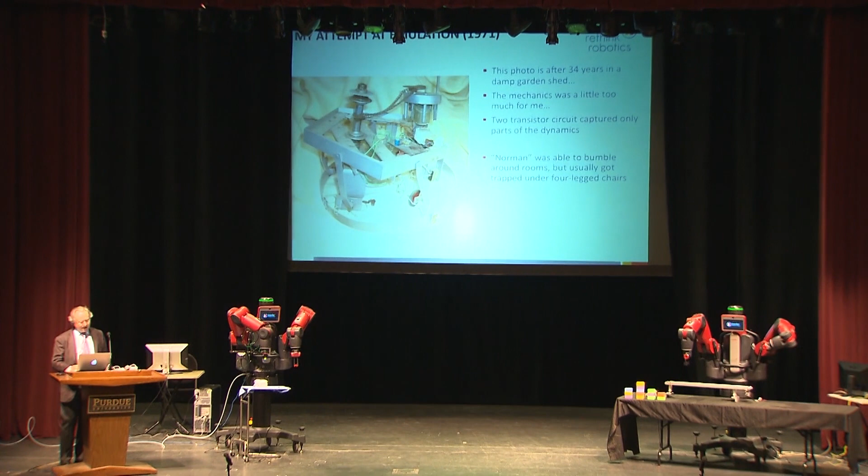So back in about 1971, I tried to build a robot based on these ideas. I used transistors rather than vacuum tubes, which didn't have all the non-linearities. This is the robot after it had been in my mother's garden shed for 34 years. It didn't look quite that sad in 1971. But it could get around the house, it could follow the lights, it could go under chairs with four legs and get stuck in there and not be able to get out. So it was a lot of fun.

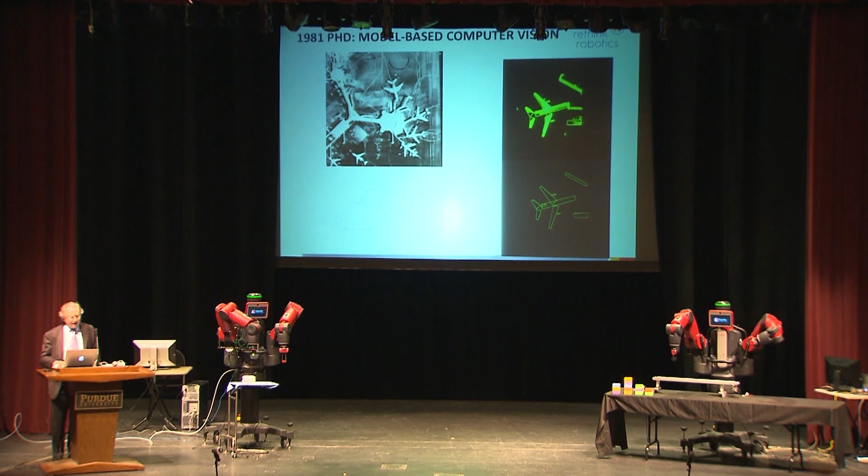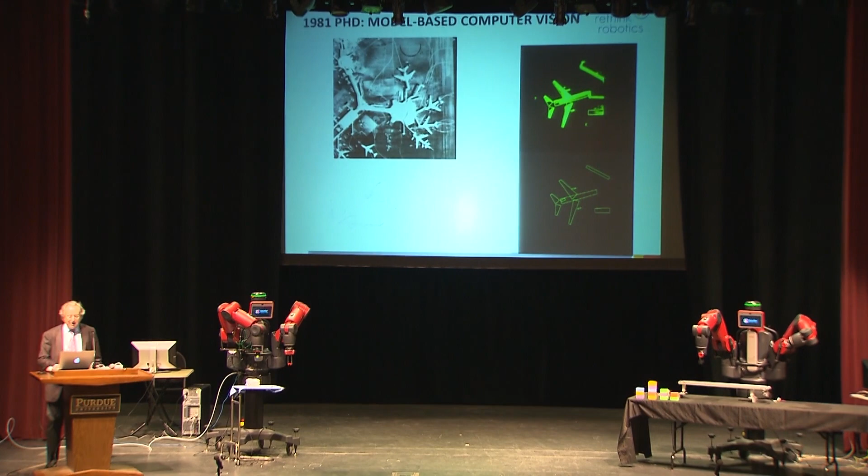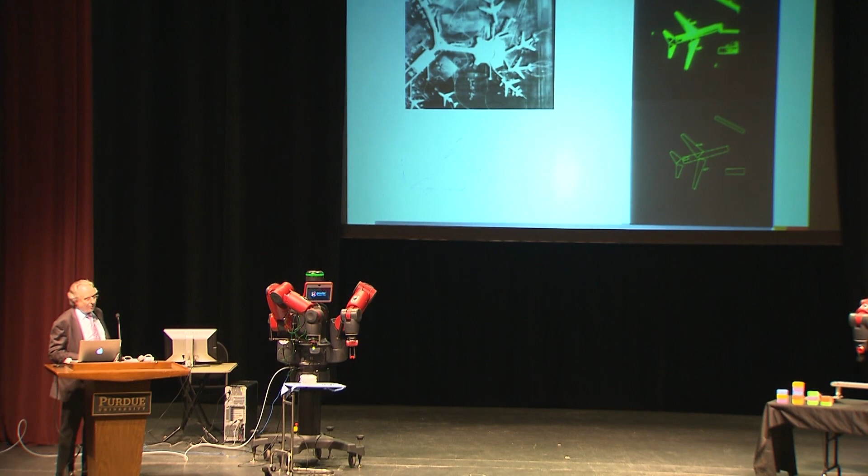I ended up at Stanford doing a PhD, and this sort of set my direction for a while. I did a PhD in model-based computer vision. On the bottom left are models of airplanes, three-dimensional models, and with a mere 48 hours of computation from that image in the top left, we'd go through to what's on the top right and get down on the bottom right a model of the plane, with only 48 hours per image. For my PhD thesis, I actually ran it on 3 images. Now, if you don't run a PhD thesis on around 3 billion images these days, you're not really testing it out. But it was about geometry.

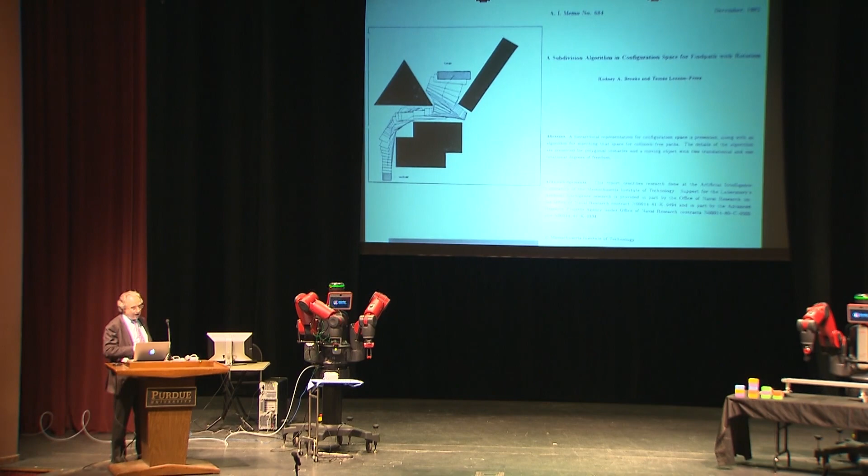So I went to MIT as a postdoc and started working on path planning and trying to apply geometry to robotics. What you see there in black are obstacles in two dimensions, and there's a rectangular object starting down in the bottom left-hand corner. This is finding a path for it to move in two dimensions amongst these obstacles without causing a collision.

I went on to think about how to get robots to plan tasks, and to figure out how uncertainties, errors in placement of things, propagated through plans, using all sorts of horrible, long, symbolic, algebraic descriptions of the errors and analyzed them.

Eventually I started to put all this together into a system which used a robot and stereo vision to get a model of the world, a geometric model, and then plan paths. This is from 1981. This is the stereo algorithm running, which I got from Keith Nishihara.

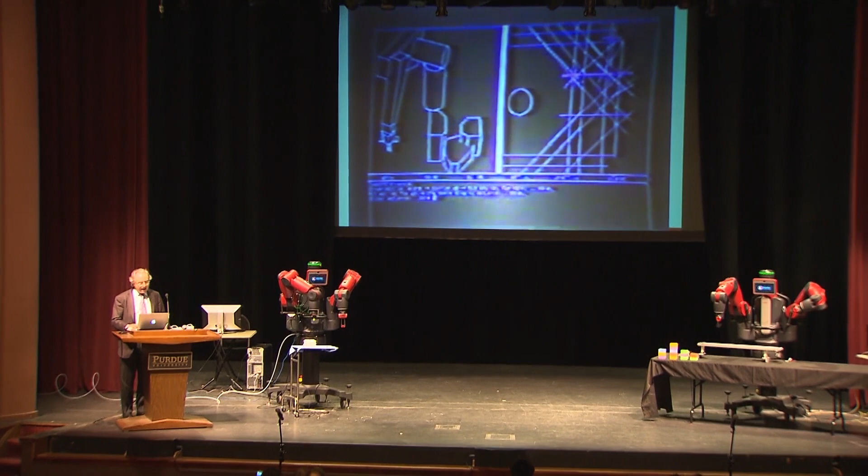And then computers had sped up. We had dedicated special purpose processors by this time. After about 10 minutes of processing, the system was able to plan out a path for that robot arm to avoid the collisions with the obstacles. Eventually we got it over to the robot, and it was able to move to do a simple screw insertion task, having planned it itself, with about 10 minutes of computation, and was able to get it in there.

I won't show you the other examples. But at the time I noticed, man, it takes pages and pages of equations to get our robot to do any new task. It takes lots of computation still on these dedicated complex machines. I was actually in a mosquito-infested area at the time, and I noticed mosquitoes could fly around really well, way faster than any mobile robot could wander around at the time. And they didn't have really big computers on board, as far as I could tell. They had maybe 100,000 neurons, which were pretty slow.

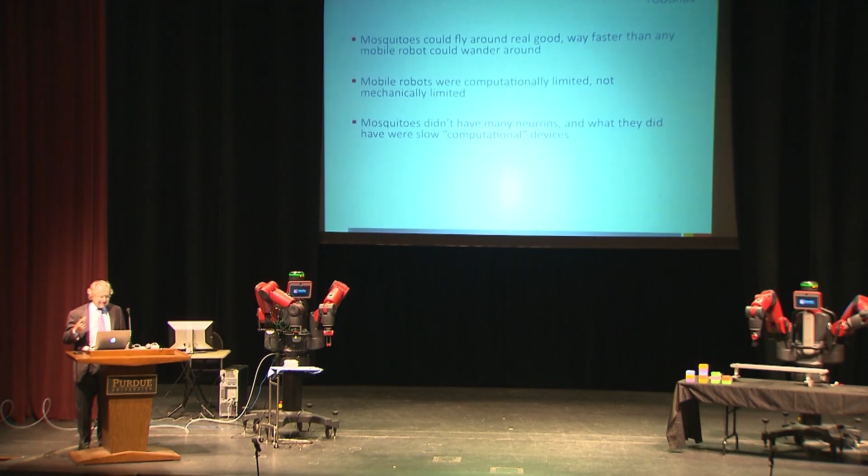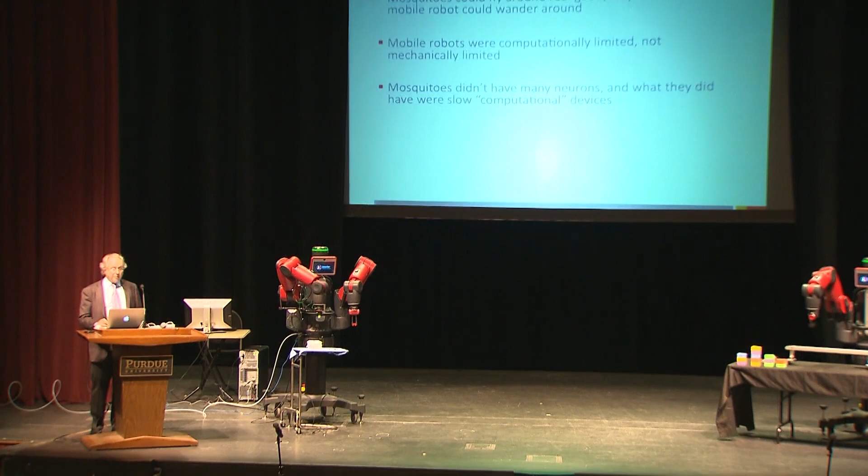They're computationally limited, and so they didn't have much computation, but they were able to act much better than any robots at the time. Right around that time, in 1981, Hans Moravec at Stanford had got a robot to go 20 meters in only 6 hours using vision to get around obstacles.

So it seemed to me we were doing things wrong somehow, thinking about too much geometry. And I started to think about how we could model animals, simple animals, insects in particular. I was in the AI lab, so I figured I'd just rename it to be the Artificial Insect Lab.

And so that's what I started doing, thinking about how to build robots in different ways and how to arrange their computation. I had this paper, which was actually published in 1986. And for those of you who get bad reviews, these were the reviews of this paper. I would suggest the author wait until a more complete version is implemented and tested before resubmitting. And the other review said it's in a tender stage of development. But somehow the editor liked the paper enough and got it published, and that's what made my career.

So, there are bad reviews. Forget it. Just keep going. Things work out. But from this paper, I worried about having multiple goals, how to have high-priority goals while servicing low-level goals, how to deal with multiple sensors.

And as soon as you have more than one sensor, you're going to get conflicting information about the world. It's going to be inconsistent. What if some things fail? How do you keep it robust? You can pull a leg off a beetle. I don't recommend doing that, but if you pull a leg off a beetle, the beetle can still run. It can lose sensors, and it still operates.

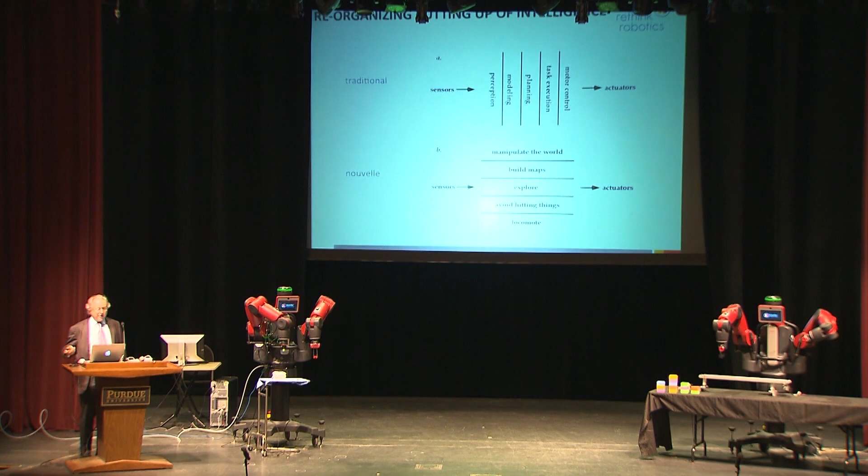First thing is get the robot to be able to locomote, then get it to avoid hitting stuff. And when they're both running, then you can get it to explore. And you don't have to worry as you're exploring about hitting stuff because that lower level behavior is still running. So the idea was to add new capabilities one after another.

I called this subsumption. And I thought of this as sort of recapitulating evolution at a sort of Scientific American level of resolution, where you connect sensors to actuators with a little sub-brain, and then you add more brain that does more connection of sensors to actuators, etc. And out of that, each layer has a little bit of perception, a little bit of planning, a little bit of action, and out of that you get a global behavior.

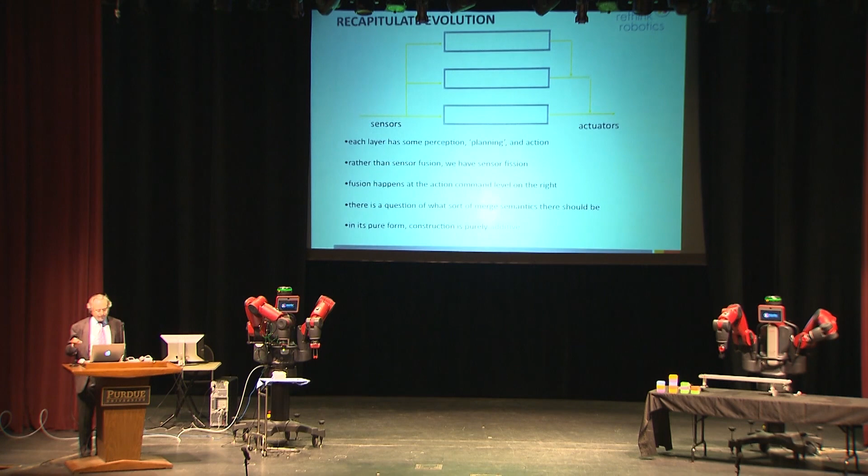So I did this for a few years with this architecture. Oh, I'm going to skip this slide. I've got too many slides here. Sorry, I should have got rid of that animation.

And so putting a layer to get a robot to wander around without causing collisions, of little tiny finite state machines talking to each other with messages, then adding a little bit more to make it wander and explore, and then adding a little bit more to get to goals that it saw in the distance.

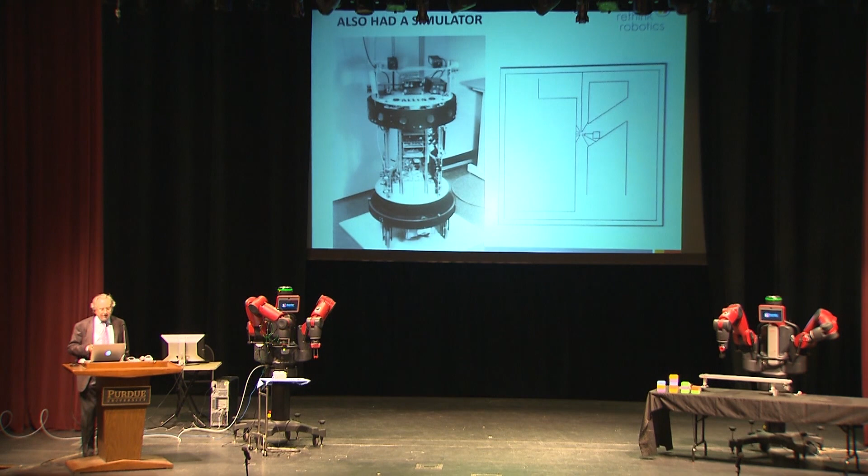And I built a robot back in 1984. I also had a simulator. And this robot was named Allen. It used sonar and cameras. And when I put this all together, this was the robot avoiding obstacles.

It sat still until an obstacle came near it, and then it would go away from it. And then another obstacle got in the way, and it would stop. And so this was able to operate not in the order of meters per hour, but in meters per second, or meters per minute certainly, so much faster than other mobile robots at the time.

People got very upset with me because it didn't have much detailed mathematics describing how it worked. It wasn't a real paper without lots and lots of equations. But I was sick of equations by then. I was a math major as an undergrad.

So adding a planning layer, here it's going to try to get to the far side of the room, and an obstacle appears dynamically in its way. At the time, all planners were for static situations without dynamic replanning. And it tries hard, and then eventually it manages to skirt by the obstacle. And if the obstacle moved in the meantime, it would capitalize on that in real time and gets around the obstacle, and off it goes.

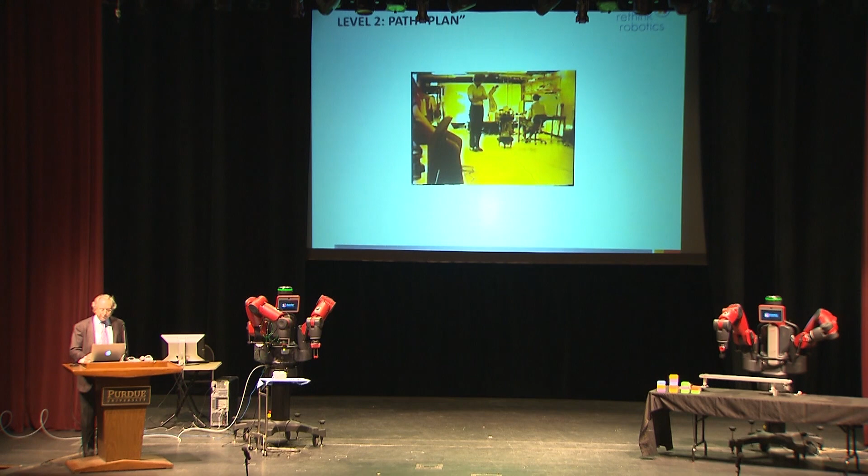So I was building mobile robots, looking at this architecture which is based on insects. And then I thought, well, let's make the morphology just like insects. And as Richard pointed out, this is Genghis, a six-legged rover, which was able to scramble over rough terrain. Also around that time, in the late 80s, I built my first vacuum cleaning robot.

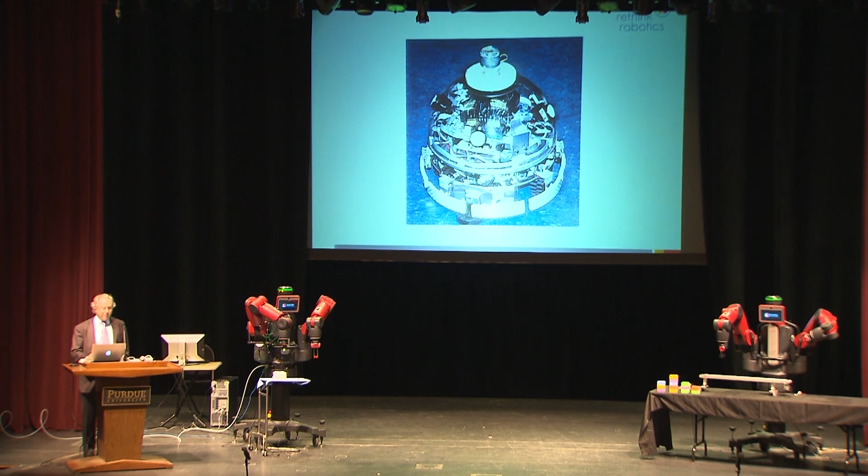It wasn't too well designed in that it sucked all the dirty air past the computer boards, which wasn't a great feature, but we'll get back to it.

With this six-legged robot, Anita Flynn, one of my students, and I wrote a paper for the Journal of the British Interplanetary Society. You might ask, why did we publish there? Who could resist a journal with that name? I had to have a publication in it.

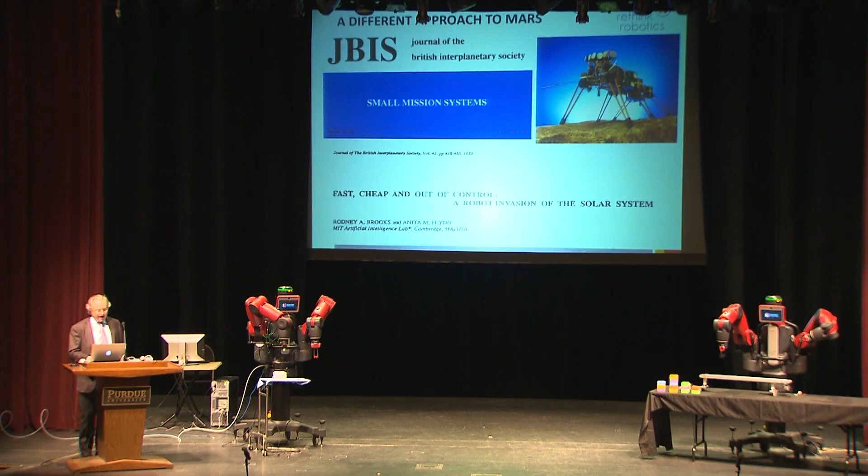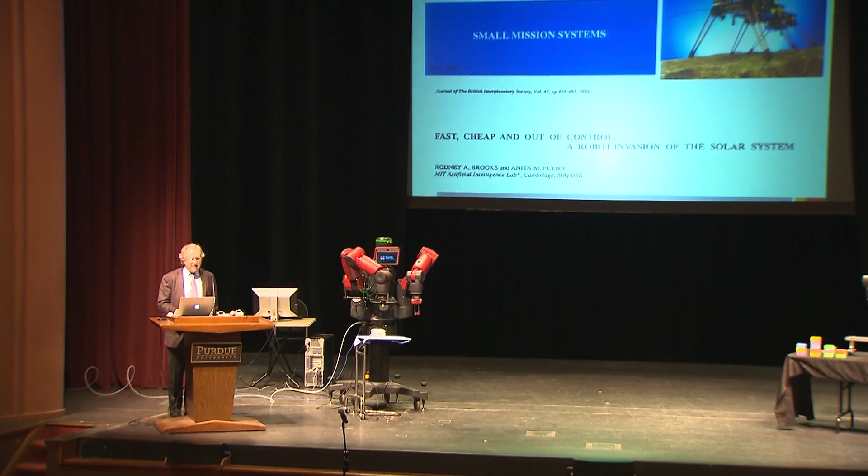And it was the same journal the idea for communication satellites had first been published in. So we said, instead of having a big robot that NASA was planning to send to Mars for a $12 billion mission, let's have little tiny robots that are not so expensive, so if you lose them you don't worry too much. It'll be faster to develop the mission, and cheaper because you have a lot less launch mass. And instead of making them servo-controlled from the ground, let them be autonomous. That's the out-of-control part in 'fast, cheap, and out-of-control.'

We worked with NASA and tried to get them to adopt this idea, and they started a little tiny project out at JPL with robots they called Rocky—Rocky 1, Rocky 2, Rocky 3. Colin Angle, here on the left, was my student at the time. He went out to JPL for the summer and got them going on that. But it was just a back-burner project.

Colin came back to MIT, and we decided we were going to do it ourselves. We were going to send robots to the moon and Mars ourselves. So we started a company which became iRobot. It was called iRobot. And by 1993, we had convinced the Ballistic Missile Defense Organization to do a test launch of one of our rovers on a brilliant pebble.

This is at Edwards Air Force Base. The sound should be on now. Avionics away. Photo on. So we've got a brilliant pebble—it has enough delta V to get from lunar orbit to the surface of the moon. But here we're doing a test in Earth gravity of it doing a soft landing.

The robot has been inside this vehicle for four days with no ground communication, totally autonomous. It does a soft landing, boots out the container—which is gravity loaded so that if it landed on rocks it would right itself—and then you'll see the rear leg of the robot on the right unlocking itself. It realizes its mission has started. It's undoing this canister, and now it's going to stand up, and we're going to launch this and have it land next to the Apollo 15 lander and do some metallurgy 20 years after it had been on the surface of the moon.

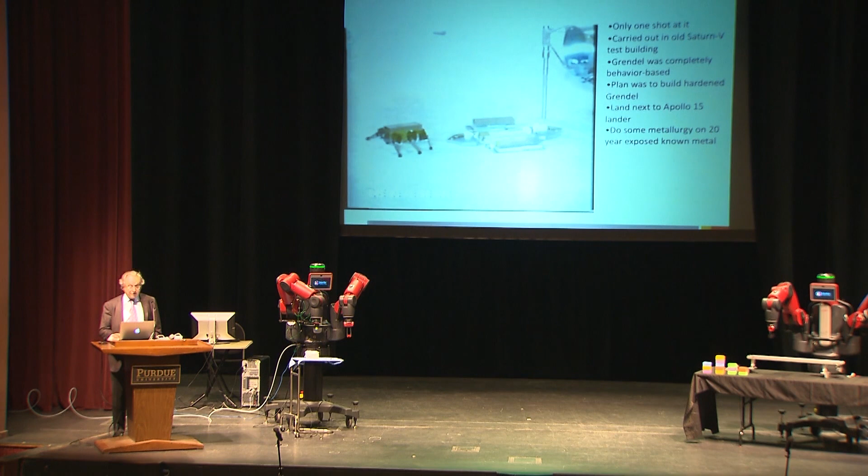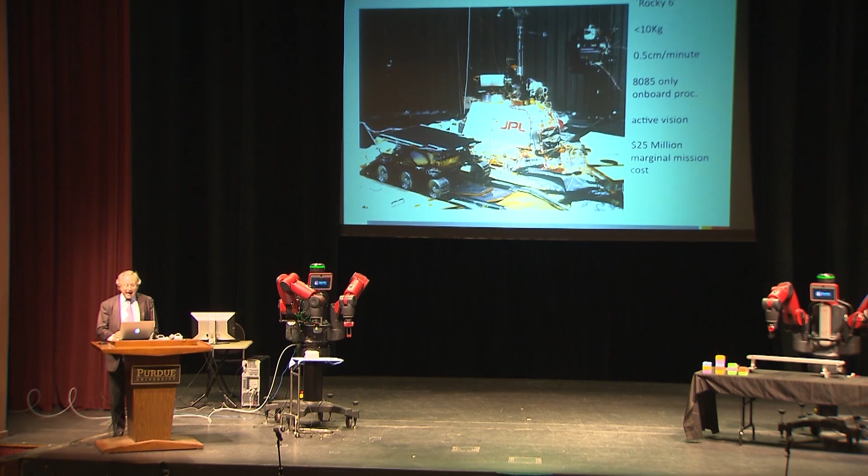Then Dan Goldin, the administrator of NASA, said, oh, we've got this little tiny project out at JPL building robots called Rocky, and we're going to land a lander on Mars in a couple of years. For $25 million, I'm going to add a rover to the Mars mission. And that's what he did. He put Rocky 6, which had come out of Colin's project—Colin is the CEO of iRobot—on board, at a $25 million marginal cost. It was launched on December 4, '96, and landed on Mars on July 4th, 1997.

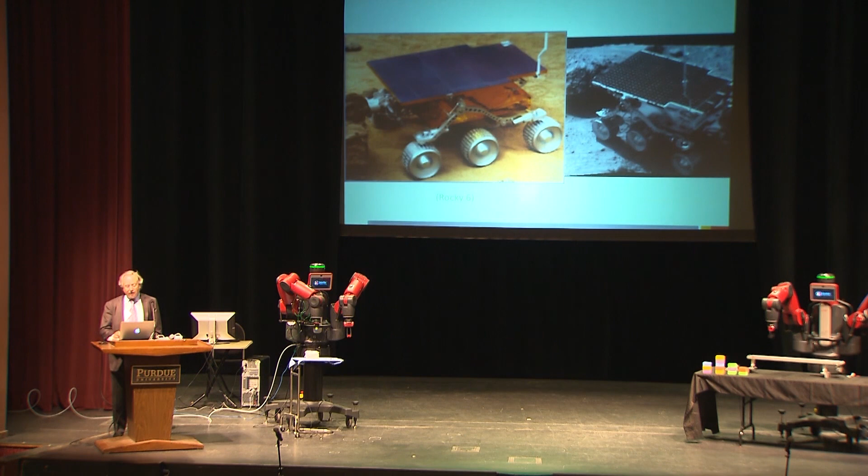The one on the left is the one back at JPL. The one on the right is a picture of Sojourner on Mars in 1997, and it operated until Sol 84. You can see it close in, and at the bottom, right in the middle, it's off in the distance from the lander. So we got our behavior-based rover running on Mars, and we effectively got a robot to another planet. Of course, our business model said we were going to do it—instead, NASA did it, so we had to find other things to do.

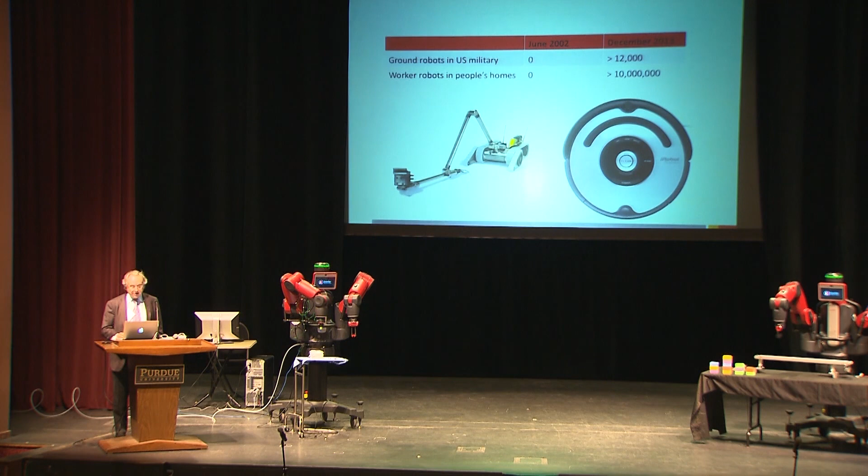And we searched around and got lots of things wrong, but we went back to vacuum cleaning robots and ended up building the Roomba, which is now 10 million of them have been deployed. And about 12,000 ground robots in the US military have been deployed in the last decade, about 5,000 of which are from iRobot.

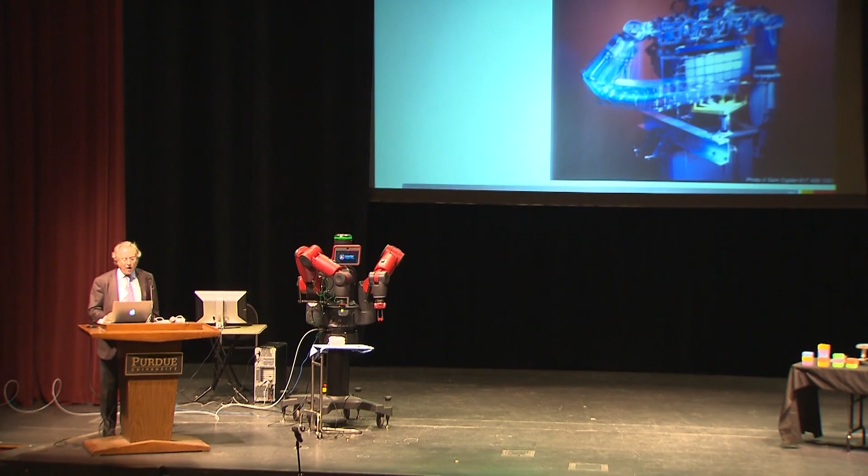So these ideas worked out pretty well in terms of getting them into practical robots. But then, while I was doing that at iRobot during the 90s, in my lab, I made a conscious decision to switch to humanoid robots, so it would be distinct from my company. This is the robot Cog, and Cog tried to emulate parts of the vision system. This is it saccading, and then moving its head while its eyes are looking at that object. And when we just added little parts of the human visual system, it started to be eerily lifelike.

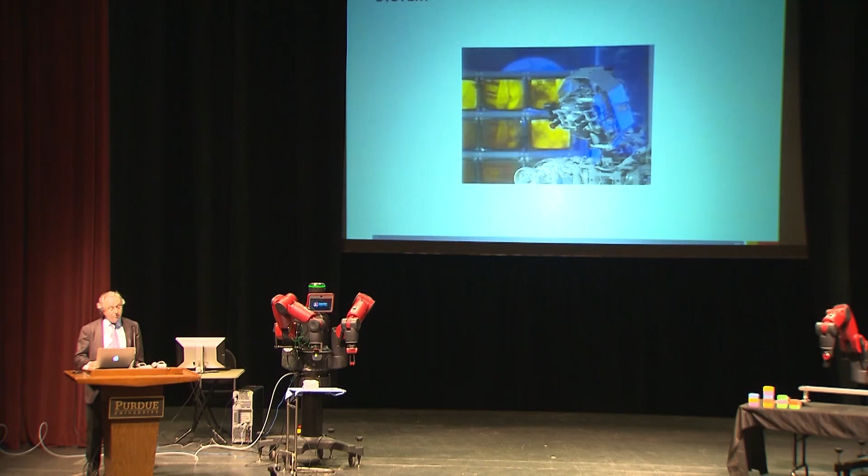And it surprised us, and it surprised people in the lab. So the grad students who had got the robot to do this started putting up barriers in the lab so the robot couldn't see them. Not because they thought it was invading their privacy, but they'd be sitting there at night, someone else would be using the robot, and the robot would look at them like this, and they couldn't, even in their peripheral vision, they had to look up.

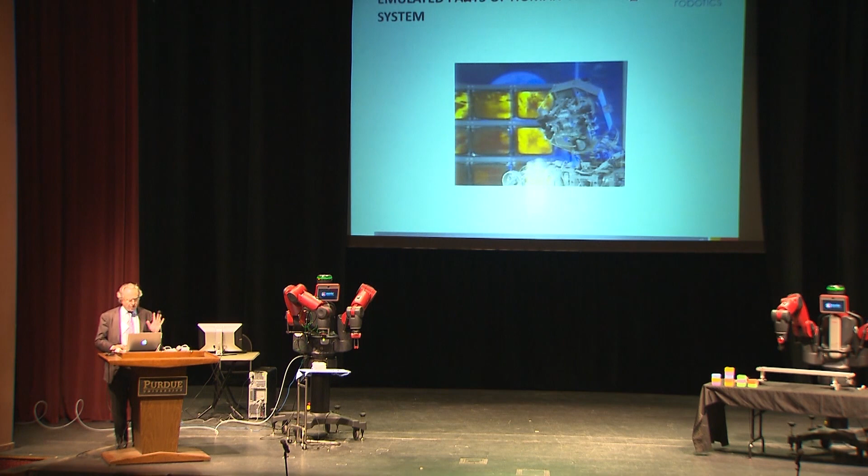So one of the things we found was it was very easy to have social interactions with these robots. We didn't have to have much sophistication. And we used something called series elastic actuators, and we were able to do tasks which used force and had to be compliant in the world with fairly simple controllers.

So there's the robot. Do we have sound? Maybe. There's the robot doing different sorts of drumming and then learning to drum in phase between the two arms, etc. And the key here was to use series elastic actuators.

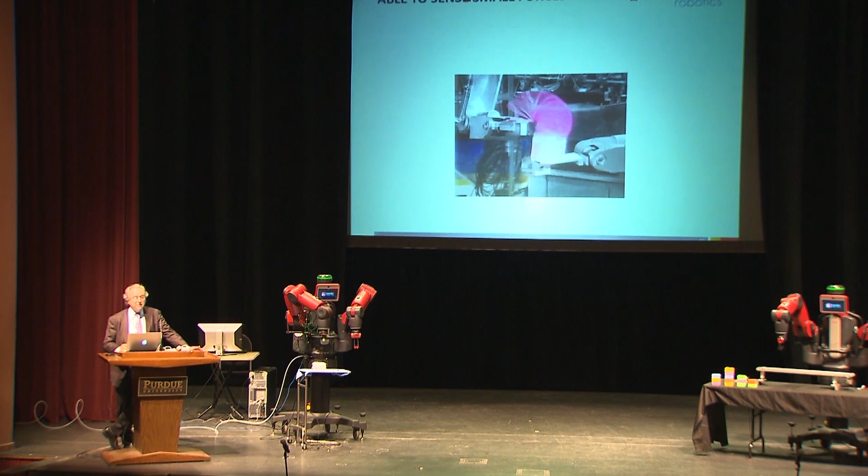I'm going to get to the next one. It gets worse. Series elastic actuators, which were co-invented by Gill Pratt, who's currently running the DARPA Robotics Challenge, the DRC, and Matt Williamson, who works at our company. You'll see a young Matt Williamson here.

And here it's doing the slinky, just measuring those very small forces and being able to feed back between them. Here it's got a pendulum, and it figures out the natural frequency of the pendulum. Here it's turning a crank, again, just by feel and force feedback.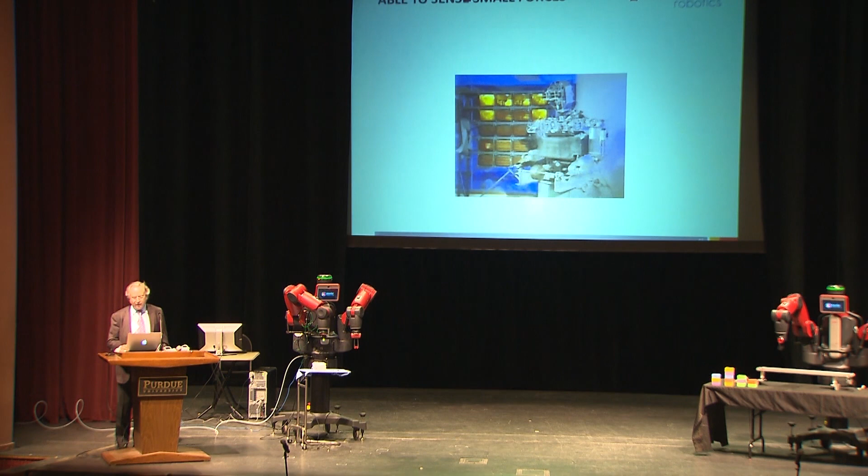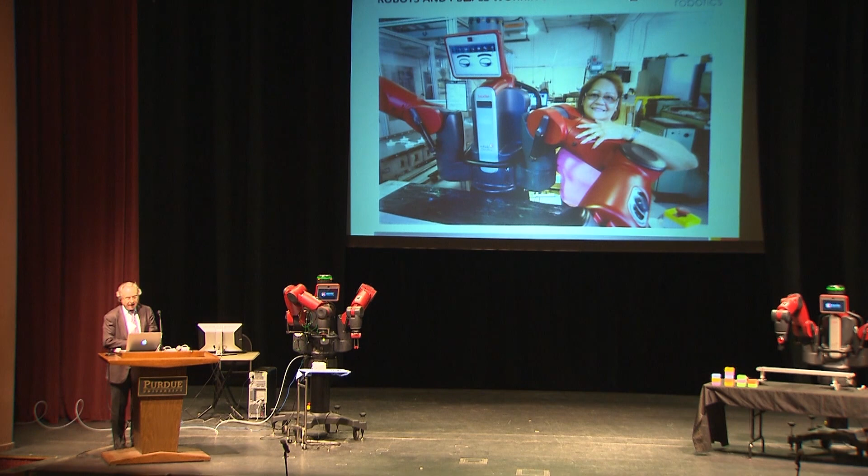So that was fun. We developed that for many years, and that ultimately led to this robot, Baxter. And I'll tell you how we got directly to Baxter in a second. This is, by the way, is in a plastics factory in Connecticut. The person there is Mildred.

Mildred has worked on the line in that factory for over 25 years. She had never seen an industrial robot, never seen a robot before, but an hour after Baxter was first set up in the factory, she had trained Baxter to do a simple task that was normally done in the factory. And so Baxter is meant in its day job, which is distinct from its academic job here, in its day job is meant to be operated in factories and small factories and have ordinary factory workers be able to train it to do tasks.

Well, how did I come to this? Well, the Roomba, 10 million of them, have been built in China. And I'd spent a lot of time on Chinese production lines. These are people in China building robots. Very simple fixturing, very simple operations.

But I came during the whatever we call them, the zips or the aughts, to realize that our current outsourcing of manufacturing to China was not going to last forever. In February of 2012, ABC Nightline had a story about an iPad and pointed out that it's touched by 325 pairs of hands in building an iPad. That's a lot of human labor for our consumer goods.

The stuff we buy, our consumer stuff, is still made by hand largely, which is sort of surprising when we've got the complexity of our information systems all digital and the internet and communications, but the physical stuff is still largely done by hand. In fact, we've been making stuff in factories by hand for 234 years. We've been using first steam power and then electrical power to do the work part, but it's by hand that's been steering that power towards production.

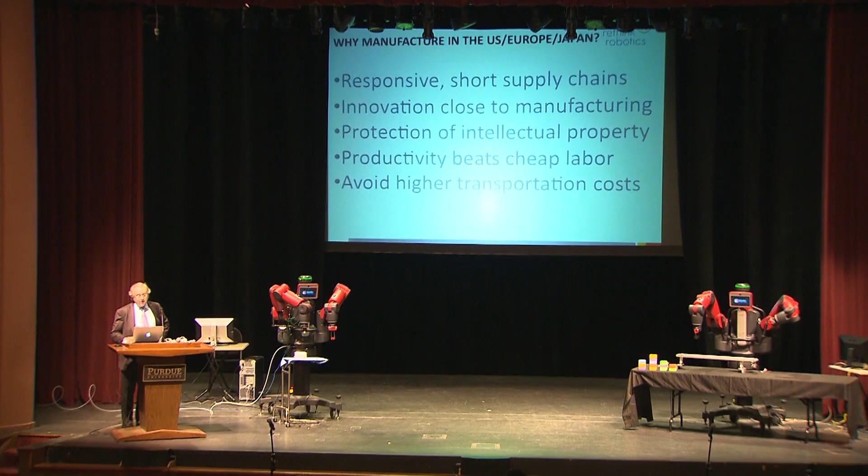So it seemed to me that we needed to break out of making cheap stuff by hand, and there were lots of reasons to want to bring manufacturing back to the US, back to Europe, back to Japan. Part of it is responsive short supply chains. But also, I think we've started to realize over the last 20 years, as soon as you start outsourcing your manufacturing, you outsource your innovation also, and you lose your innovation.

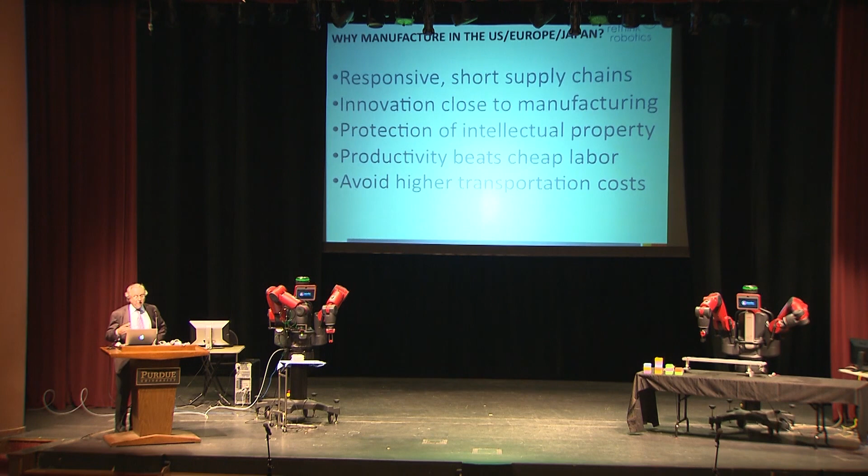Because it's just too hard to get back and forth to the other side of the world. So you let the great talent there do the engineering, and before long you're not doing the engineering in your home company, and you've lost control of the product.

So let's use robots instead of people. Robots have been in factories since 1961. The first ones were built by a company called Unimation by Joe Engelberger, who's still alive. First installed in a GM factory in New Jersey in 1961.

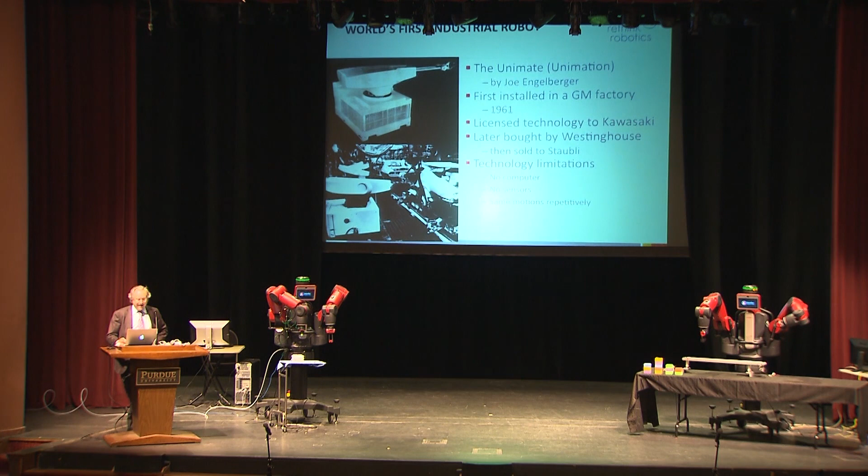Back in 1961, computers were really big and expensive, so the robots didn't have computers. They didn't have much in the way of sensors, and they did the same motions repeatedly, again and again. Still, a lot of robots today, a lot of industrial robots, are doing the same sort of thing. They're just a robot arm. They do have microprocessors now, running complex things like Kalman filters to model the wear on the gears and make them accurate.

So these robots are fantastic devices. You can run them for 10 years without servicing, and they'll follow a trajectory to an accuracy of 0.3 millimeters again and again every 20 seconds for 10 years. But they've been engineered to be precise and repeatable, not to be adaptable, flexible, or easy to use.

So industrial robots only get used in very structured environments. In fact, most industrial robots, 70% of them in the world, are in automobile factories, in the body shop and paint shop. And they don't have built-in sensors, so they're dangerous to be near. They're big, powerful devices, so people can't work with them. You tend to have places where it's all robots, or in final assembly, it's all people without robots. They don't mix very well.

Since what they're good at is following a trajectory accurately, most applications out in the world tend to require incredibly expensive systems integration, safety systems, and specialized programming. The capital cost of the robot is only a small fraction of the total cost of the system.

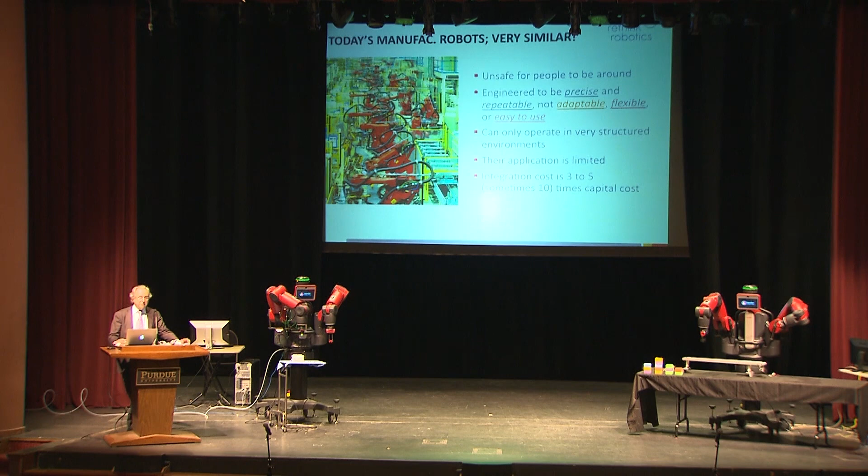So the robots you see out in the world tend to be like this. These are building car bodies. They're doing it very well, very accurately, much better than people could do it, but it's all robots, no people, and this whole system is guarded so that if anybody goes into that area, the whole system shuts down. You better make sure those robots are 100% reliable all the time, because you can't have people going in and fixing stuff without shutting down the whole system.

In my view, what's happened is we've continued to build industrial robots in the old way, where they're hard to use, without the sensibility that we've applied to our consumer devices. These are really complicated devices, but they've been made easy to use.

If they were... I used this example, I told Richard earlier today. This has got Unix in it. So does an Android. If you jailbreak this one, you can type a command line, a Unix command line, and make a phone call. Well, I could do that, but I wouldn't be making calls all the time if I had to type a Unix command line. We made these easy to use. We haven't made our industrial equipment easy to use.

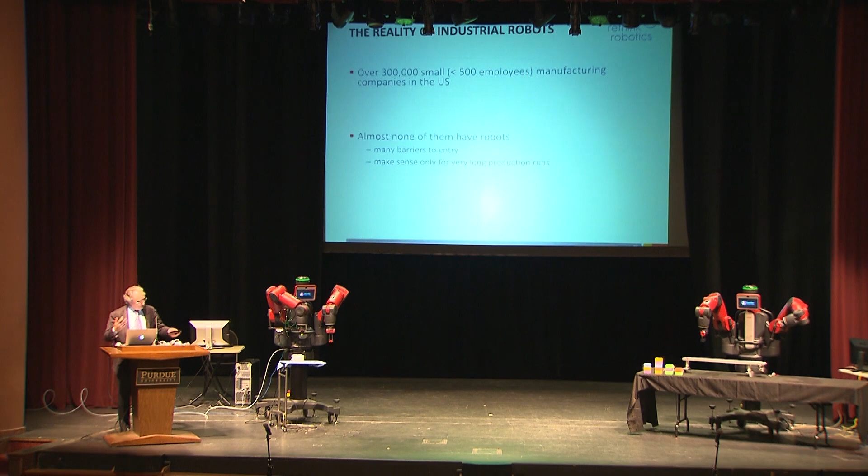So to me, it was important to make industrial equipment easy to use, because there are over 300,000 small manufacturing companies in the US, almost none of whom have robots, because there are just too many barriers to entry. You need specialized programmers. You need all sorts of extra equipment.

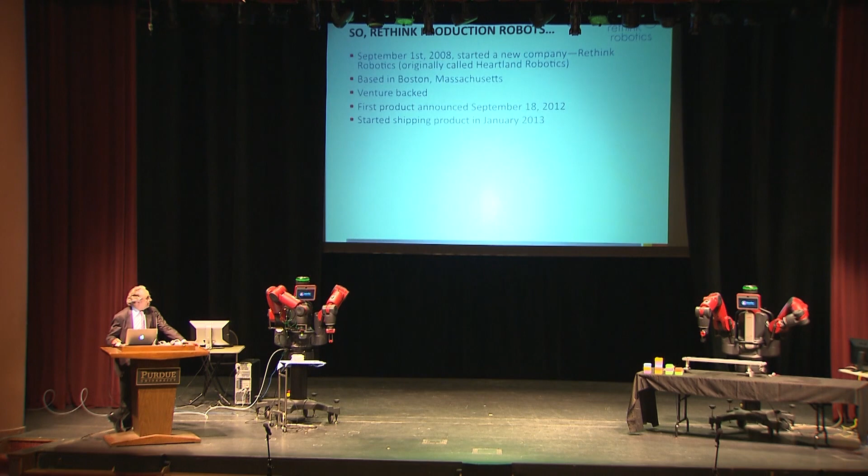That led to Rethink Robotics. I call them production robots. They're not industrial robots, they're a different category. It's venture-backed. We started in 2008 and shipped our first product in 2013. We were very secretive about what we were doing, although when we put out our new logo, I thought everyone was going to know exactly what we're doing. The logo's in the top right corner there. It's a guy with an orange shirt and a round head next to a red robot with a square head.

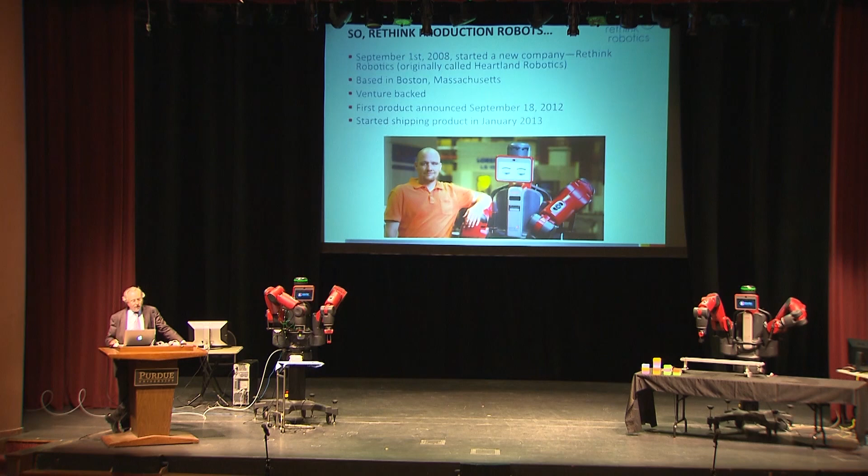And this is a real factory worker in a factory that makes gearboxes for Harley Davidsons, actually. He wasn't wearing the orange shirt, but I think Sue gave him the orange shirt so that we could take this photo of him. We've been shipping these robots for just over a year. You can see them up on stage.

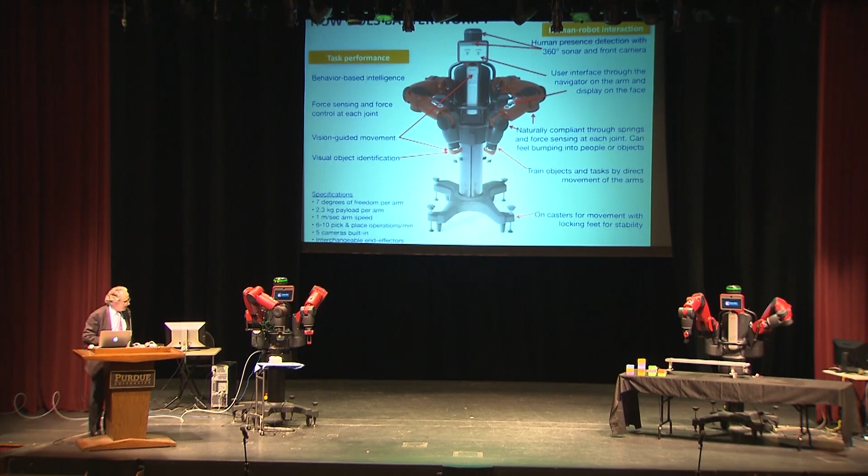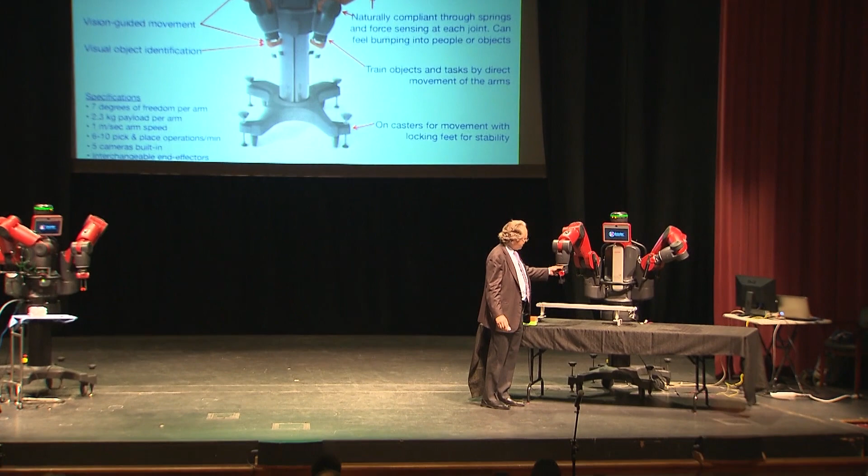They have these series elastic actuators in them, which let them sense force. Whenever you grab a robot arm, or grab the arm here, it goes into what we call zero force gravity compensated mode. So you can just move the arm around as though it's floating in space. If you don't grab it down there, it's sort of springy, and it's springy not exactly because of the springs in the series elastic actuators, although it's part of it, but it makes it safe to interact with.

I'm not going to—normally this is set up for a demo. Normally I'd have this swinging wildly and I'd put my head right in the way of the robot arm.

I don't recommend that with an ordinary industrial robot. But it senses force - it senses the force at the wrist and tries to make zero force there while compensating for gravity. So the way you train this robot is by grabbing its arms and showing it things. Oh yeah, by the way, there's a camera in each hand, there's a rangefinder, there's accelerometers in the end. So it's sensor-rich, and it's able to see objects in the world, which we'll see later.

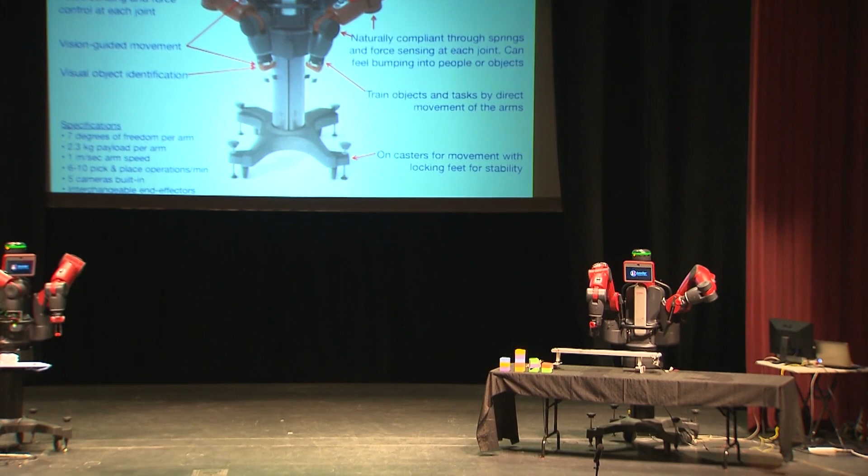So we think this is a new category, a different sort of robot, in the same way the Roomba floor cleaning robot was different from what was out there before. Our idea with this, and we haven't completely gotten there, is that there should be no integration. You take the robot out of the box, it's got cameras, force sensors, other sensors, and it should just operate out of the box. Our goal has been to have it working in under an hour. Occasionally happens. It does require, in practice, a little more integration than that.

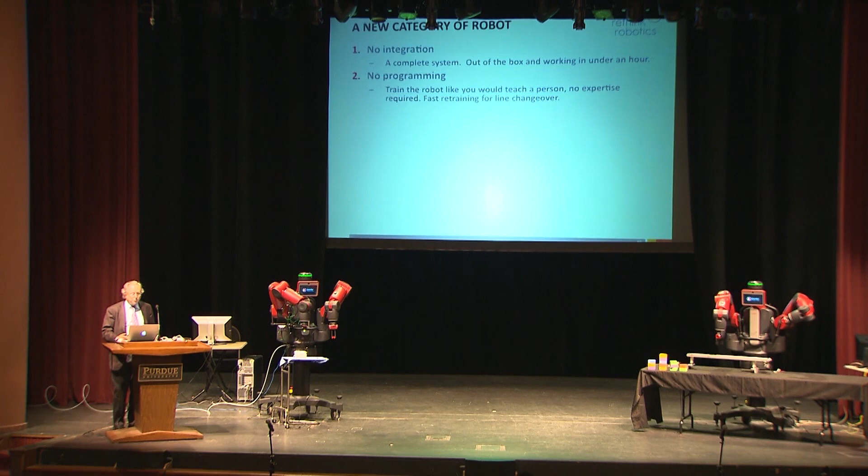But you don't program it in code. You train the robot like you teach a person - you show it what to do. That's with our manufacturing software, which is not on these robots. But the idea is when the robot's finished some task that you might operate on for a few hours, you move it over to another line, have it do something else.

It's aware of its environment, adapts automatically to some changes in the environment, and most importantly, no safety cages. It's safe to be close to.

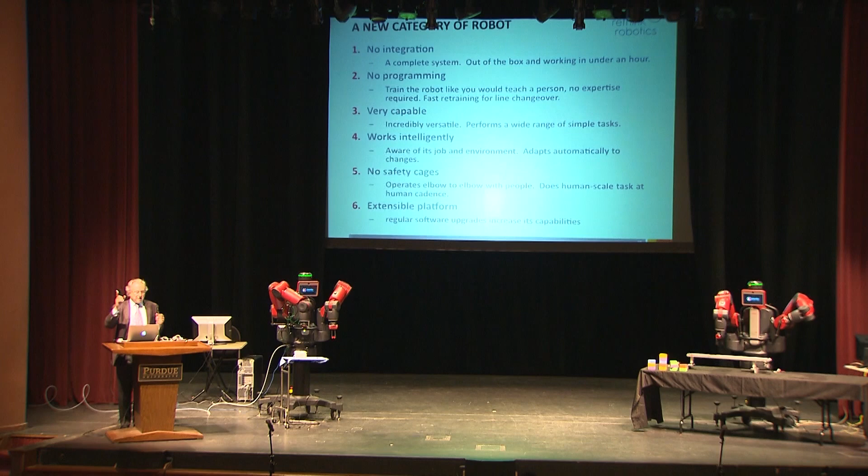And we view this as a hardware platform, just like Apple, say, or Samsung views this as a hardware platform - that's the phone. But iOS is a software platform that happens to run on here, happens to run on iPads, happens to run on other devices, the iPods maybe. And you can upgrade the software without upgrading the hardware, but you increase the performance. So when I went from 6 point something to 7.1 on here, or 7.0, it was a completely different experience with all sorts of new capabilities.

So when a new software release comes out for Baxter, it really improves what it can do. Earlier this year, we increased the speed of the robot dramatically. We've got a new release coming out next week, I think, which increases the speed even more, increases the accuracy of how well it can go to a position, decreases some of the sloppiness in the motions, and lets you train more complex tasks. So software is independent of hardware - they're two product lines that can change over time, but they're independent. That hasn't been the way we've thought about robots before.

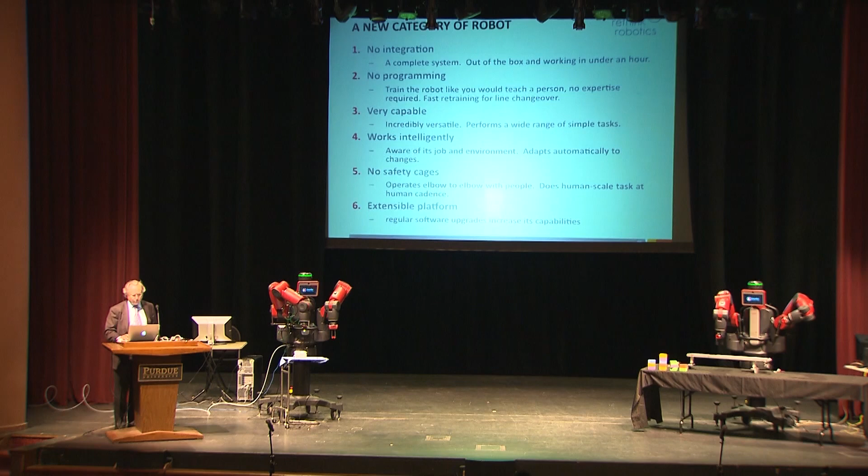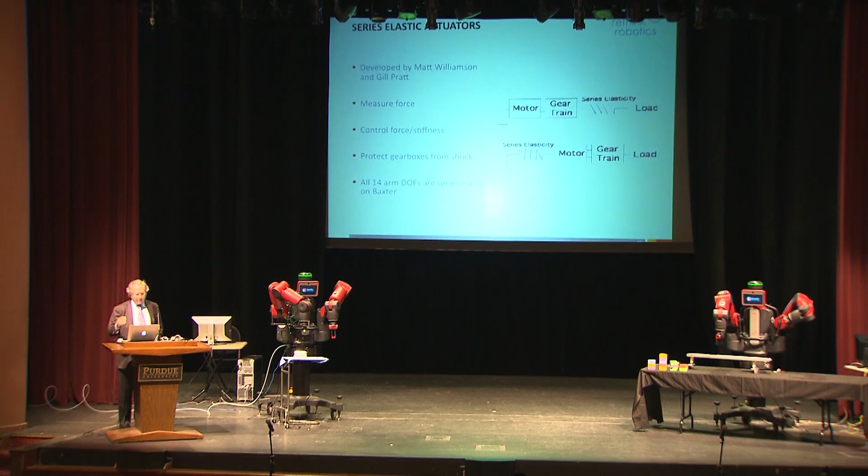This is the series elastic actuator I told you about, where there's an elastic element in series with the motor, gear train, and load. It lets us control force and stiffness, and protects gearboxes from shock, etc.

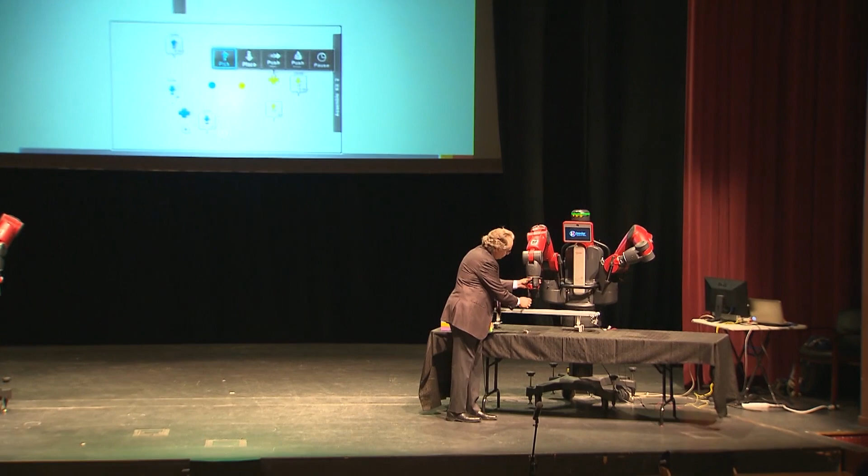And then we have this. I can't show this to you on this version of the software. Imagine this is a cup, okay? This watch - imagine it's a cup, and they're not running the manufacturing software. But when you grab this, and I don't think they're - whose demo is this? If I press the buttons, is that going to cause any problem? Can I experiment? No, it's not running.

Okay, when you press this lozenge button here, it changes the state of the gripper. So suppose this is a cup, and I bring the fingers down closed, then press the lozenge button - they'll open, it'll feel a force, and it'll infer the person must have meant they wanted me to pick something up here, because there was nothing in my hand before and now there's something in my hand, and the way to do this pickup was by opening my fingers. Whereas if instead I'd brought the hand down with fingers open and closed them, it would have inferred this is a pickup location, but here I'm supposed to pick up by closing the fingers, because that's what happened and I felt the force.

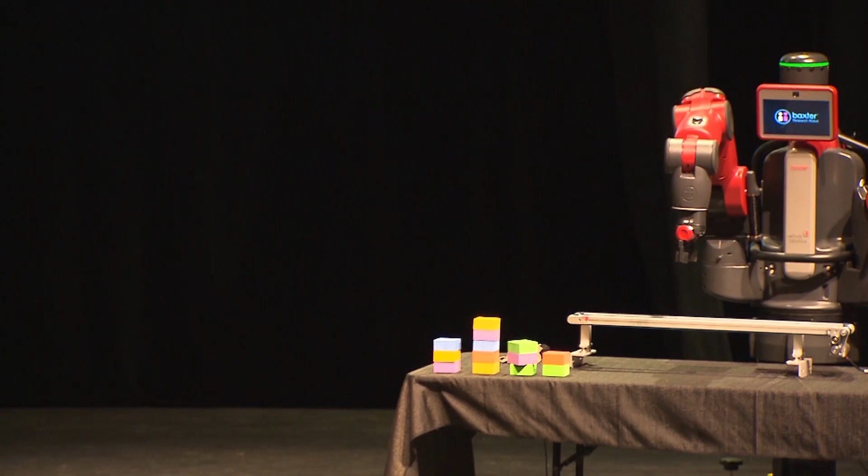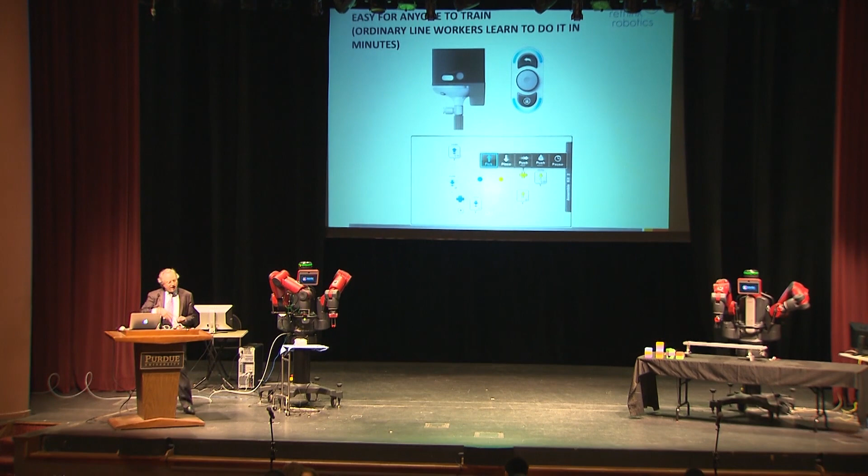Now, we could have made the user interface menu-driven - saying now I want to do a pickup, click, now I'm going to choose which way to open or close the fingers to determine what sort of pickup it is, a couple more clicks. Instead, we just show the robot what we're doing and let it make those inferences. So in the manufacturing version of the software, the face - why is that face there, by the way?

The face is there because in the manufacturing version of the software, the eyes glance where the hand is about to move so people working around the robot aren't surprised when it moves. It's not like it looks over here and does that—if it's going to move there, it looks over there first, so people feel safe around it because they know what's about to happen, and they pick this up very quickly.

As you interact with the hands, it will infer things like a pickup. This is a map showing its workspace, with blue being the right arm and green the left arm. It will infer there's a pickup—you can add a description of the object from the cameras by pressing the eye icon. It will infer put-downs too, and you can tell it whether the object is static or moving, etc.

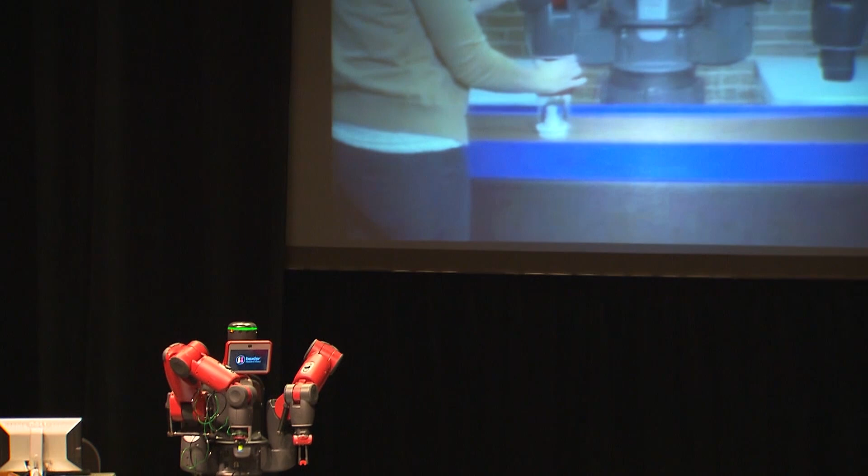Here's training a blind pick and place, a very simple task—this is actually version 1.0 of the software. Here she closes the fingers, and it infers that was a pickup, puts that icon there. Then she opens the fingers, it infers and nods that was a put-down, and that's a pick and place task where it's not using vision at the moment.

So she's got to put the object where it's going to go, to where she showed it the pickup. It goes down, closes the finger, feels it's got the object, moves it over. If she stole the object from it, it would go back and look for another one—that error recovery is built in.

This arm's in the other way—I'm going to move it out. It's a little puzzled, it's figuring stuff out, optimizing the program slightly, puts it down, and has done the task.

And here, it's going to be whited out on the screen—I'm sorry about that. Here's the same task showing what appears on the screen. That's all white, isn't it? Okay, I'm just going to let this run because this next part is what I want to show you. But it's nodding, putting up the symbols of a pickup and put-down.

From zero to a simple task is easy. Simple things are simple, but you can drill down deeper if you want something more complex, and say, by the way, when you're moving from the pickup location to the put-down location, I want you to be 22.5 centimeters above the table. And here she's just in the way—oh, it hit her, didn't hurt her, sorry. It's safe to be around and work in close proximity.

Here's just showing you some vision. He's trained it to pick up these cups by putting fingers in and opening outwards, and he's showing it where to put these, and then you'll see it servoing on that. It doesn't need to be told the velocity or direction of the servo—if you change those, it adapts, uses a KLT tracker, and is able to go and put these objects down.

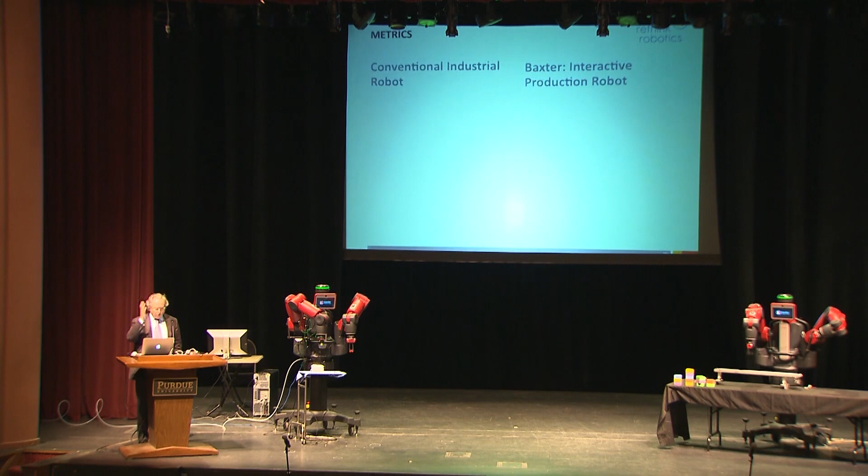So I want to talk about metrics. Something that comes up with this robot all the time is people think, it's a robot, therefore I should apply my conventional metrics to it.

You've got an industrial robot in your lab—how high can it jump? It's a silly question, it doesn't make sense. But by the way, Marc Raibert at Boston Dynamics is very proud that his robots can jump 4 meters, because they jump over a fence and they're spy robots. That's the right metric for his robot, but it's the wrong metric for an industrial arm.

Honda, with their Asimo robot, have announced that it can jump, I think, 1 millimeter, and they're really pleased by that. Conventional industrial robots have had metrics of precision, repeatability, and speed—that's what makes sense for them.

We think Baxter has different metrics that are important: adaptability, flexibility, ease of use. Now, throughput is important, but that's not the same as speed.

If you're getting the robot to do a task for just a few days, it's the total amount of time it takes to integrate it, train it, and do the task—not necessarily the takt time on each individual operation. If you're getting an industrial robot to operate for 3 years, it's all about how fast each operation goes. So throughput rather than absolute speed is important.

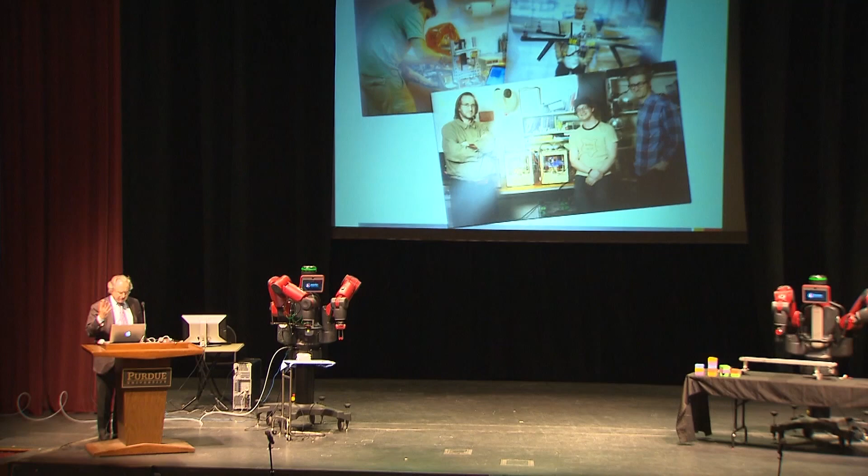But there's some other stuff going on in the world which is changing manufacturing—this is the maker movement. In the top right corner is Chris Anderson, who used to be editor-in-chief of Wired; before that he wrote for The Economist. He started playing around on his dining room table with quadcopters, and before he knew it, he had started a company called 3D Robotics, quit his job at Wired, and became one of the darlings of the maker movement.

So there's some real stuff happening in this maker movement. I think it's very similar to what happened in Silicon Valley in the 70s, where the Homebrew Computer Club was saying, we're going to build our own computer. And if you saw the original Apple, it had a wooden case too, which was pretty goofy.

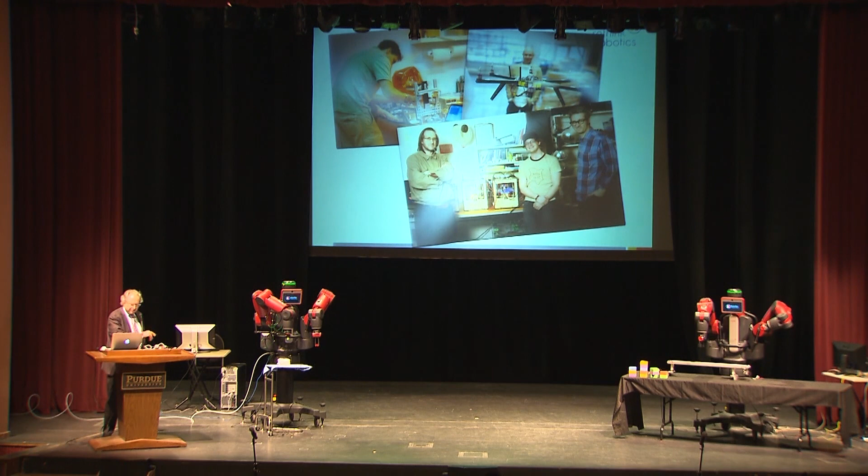So there's stuff happening with easy-to-use robots, there's stuff happening with maker spaces. As these 3D printers get better and better, there's going to be all sorts of stuff—they'll be able to be used to make tooling. When we can mix plastic and metal, the 3D printers are going to be better, and maybe we'll get them high speed. I don't know whether they're ever going to be used for volume production, but in the future, production may not operate at such volume levels.

I don't know exactly what the models are going to be, but here's just a little idea. This is a current model of manufacturing: a product company sends a design off to a big factory in China.

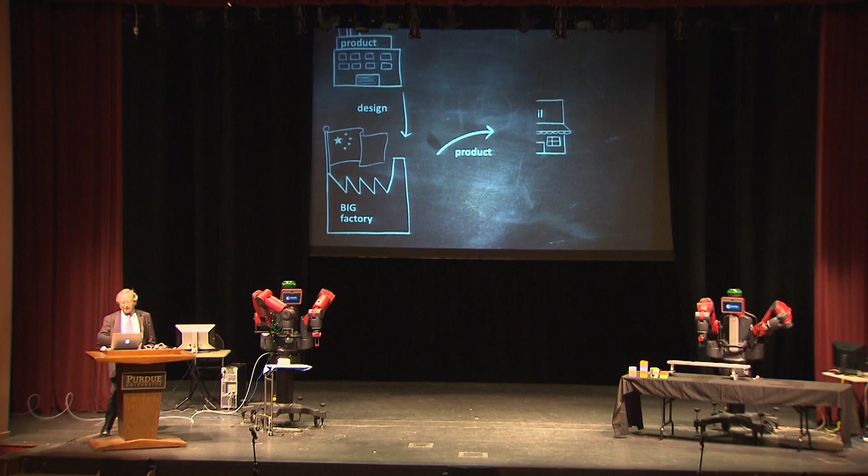They build the product, they ship it to the US, it goes to big box or virtual retailers who then get it out to the customers.

In the future, it may be a little different. Maybe the product company doesn't send the design to a factory in China, doesn't own the design, but sells the design directly to the retailer. The retailer buys the design, not the product. Then the retailer geographically puts out for bids to little factories all over the country, which may be run by makers, may be run by different sorts of businesses than we have now.

And then they make the product locally. Instead of shipping it all over the country, perhaps, then they send it out to consumers, either through e-commerce or maybe to local brick and mortar stores. I don't know, but a different sort of model.

And could we really change manufacturing and change the models of how companies work? Well, a friend of mine at MIT, Deb Roy, 4 years ago started a Twitter analytics company, which he then sold to Twitter right before the IPO. Rumor is it was $100 million. 5 years ago, did any of you know that we needed Twitter analytics companies?

No. So as the technologies change, the roles of businesses and who are the business players and what they do change, and it's an incredible place, I think, for entrepreneurial activity from students such as yourselves at places like this who have the training to come up with new business models and get in there and do new sorts of things.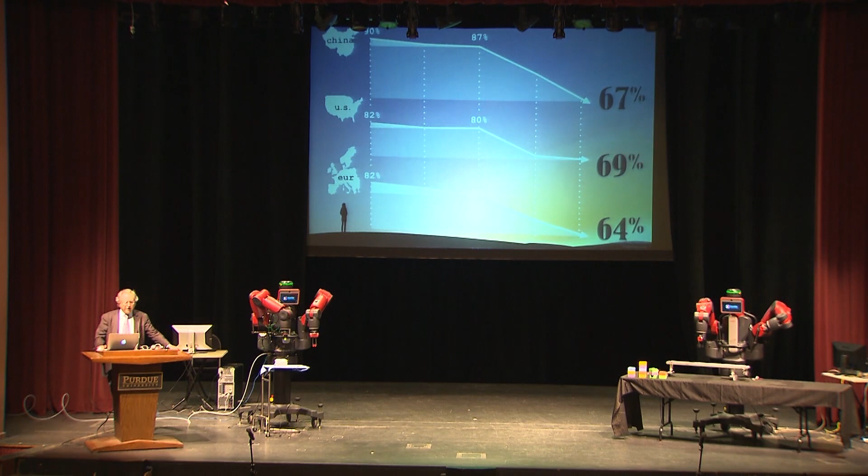But meanwhile, I think our world is driven by another issue. In China, the US, Europe, if you look over the last 40 years, the percentage of adults who are working has gone up. But that's about to change drastically because the baby boomers are about to retire. In China, it's slightly different reasons, but it also is happening. And so the percentage of adults that are working is going to be much lower, and the number of elderly people is going to be much higher.

So the ratio of working age people to elderly people is going to go down dramatically. So who's going to look after me when I'm old? Who's going to provide me services? I'm going to be sort of stuck with no one to provide me services. Now, I think robotics in general is going to help here.

People talk about self-driving cars. I saw some work here today about self-driving cars or augmented driving for cars. There we're turning cars into robots, and that will let the elderly, like me, drive safely much longer because the car is much smarter about driving. But I think there's going to be a real pull for technologies, physical technologies, that let the elderly maintain control of their lives and stay in their own homes longer so they don't have to go into managed care. And I think it's going to be a tremendous pull.

Which brings me to Baxter Research Robot. We're a little company. We've been building a robot to go into manufacturing.

But when I looked back at how the self-driving car had come about, I realized it was because in the late 80s and early 90s, we went from a handful of research labs in the world that had mobile robots to hundreds of research labs that had mobile robots, because little companies started selling mobile platforms that universities could buy. And so by the mid-90s, instead of maybe 10 or 20 people working on navigation of robots, we had 5,000 people working on navigation for robots.

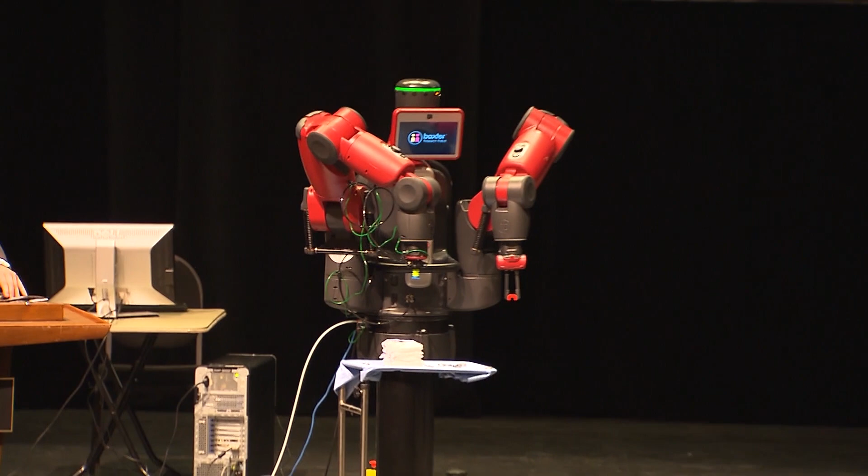This is our latest version of the software. Someone said, well, can Baxter make me a cup of coffee? So one of our application guys, who told me he's never written a line of code, in a morning got Baxter to make cups of coffee. So thank you, and we'll see the demos now.

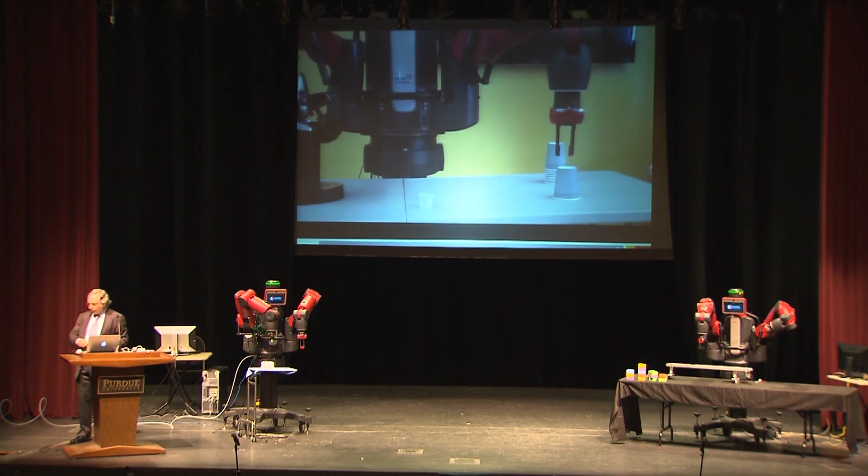Thanks. Okay, can you hear me now? So the benefit of the Baxter approach is programming by demonstration. The Baxter is what we call lead-through teaching, where they actually use the robot to observe what the human does. We're looking at actually having the robot look at the human through both sensorizing the human as well as using computer vision.

There's just a very simple task they're going to do here, just so you can see it from far away: a simple block picking task. They're going to go through a couple operations of actually showing a program being created.

So the blocks are now fed by the invisible feeder operator here, which we can just ignore, but we have our human user, which is going to demonstrate the task for the robot. In this case, it's simply doing a simple program of picking up blocks, a fairly simple task of grabbing just the yellow blocks and letting the other ones go.

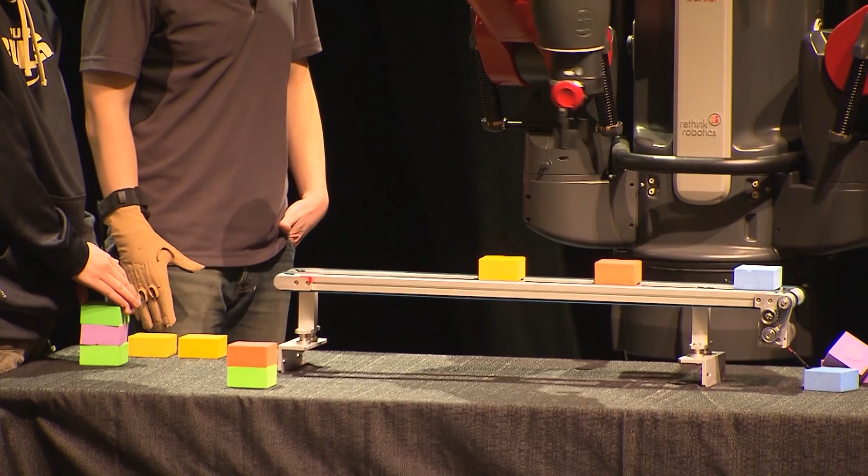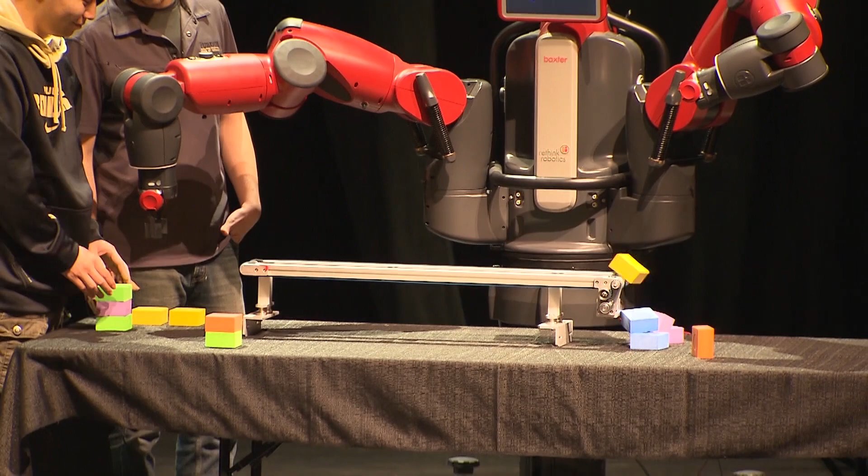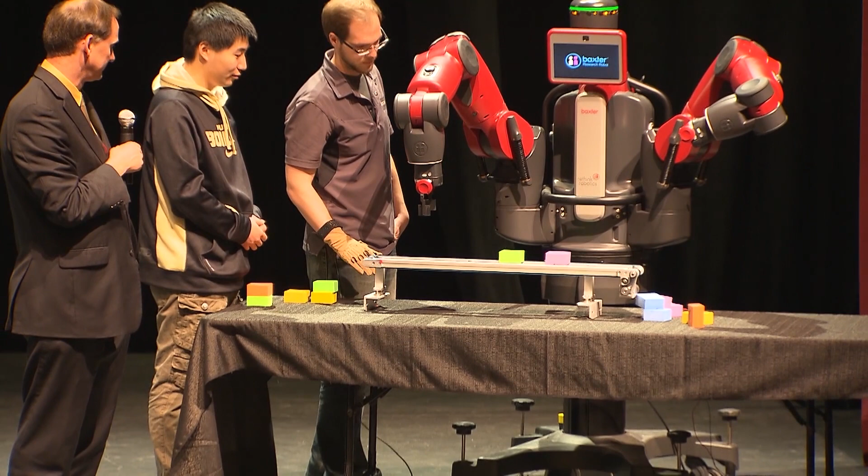Uh-oh. All right, well. What are you doing different in this one? Oh, okay. All right, well.

Okay, well, the idea is, again, just showing it a different task and having the robot watching through demonstration what the human is doing, abstracting the motions that the human is doing, whether taking the same colored blocks or different colored blocks. And now, I'd like to introduce another professor.

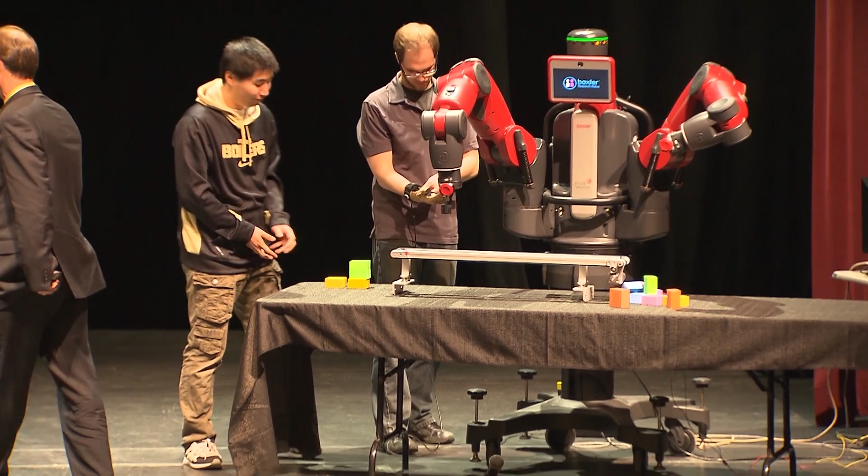Professor Juan Wachs from the Industrial Engineering Department is going to tell us about the Gestonurse. So what we have here is a different application for this unconventional robot, the Baxter. We want to use this robot to assist surgeons in surgery. So what we have here is a pair of students, a graduate student and an undergraduate student.

He's not a surgeon, but he's practicing this task. He's an engineering student. And what we are trying to see is how we can use this robot to assist surgeons by delivering surgical instruments as the surgeon requests them.

We are looking into natural interaction. This is unconventional interaction for robots, but it's very conventional between humans. How surgeons interact with surgical nurses is through speech, through hand movements or gestures, and even through body stance and body language. So we're going to look into those three different modalities: speech, gestures, and what we call foot gestures, where there's a Dance Dance Revolution pad there, and the surgeon is going to use that interface to interact with the robot as well.

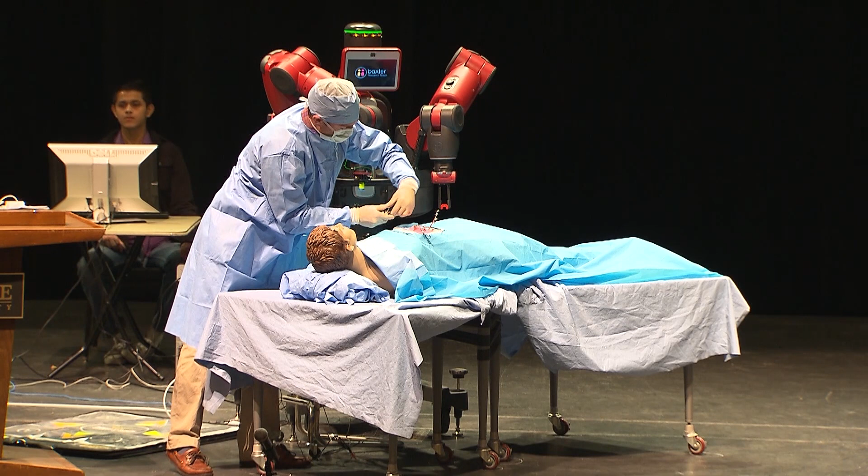These are foot movements or foot gestures that the surgeon is using to communicate with the robotic assistant.

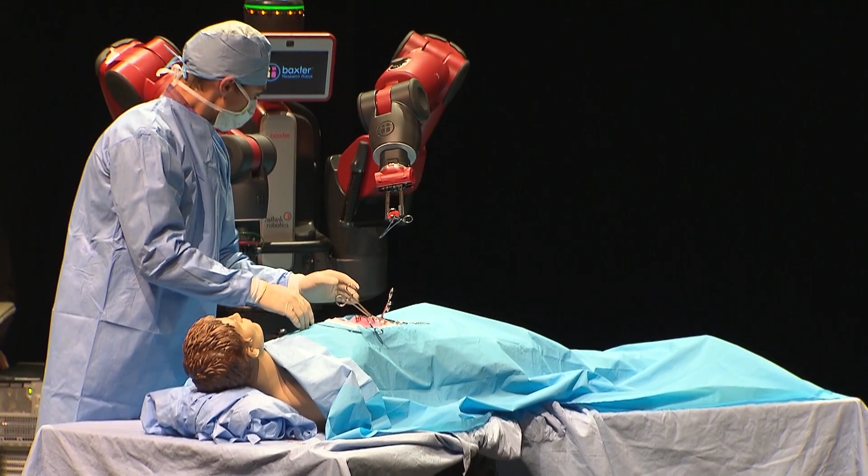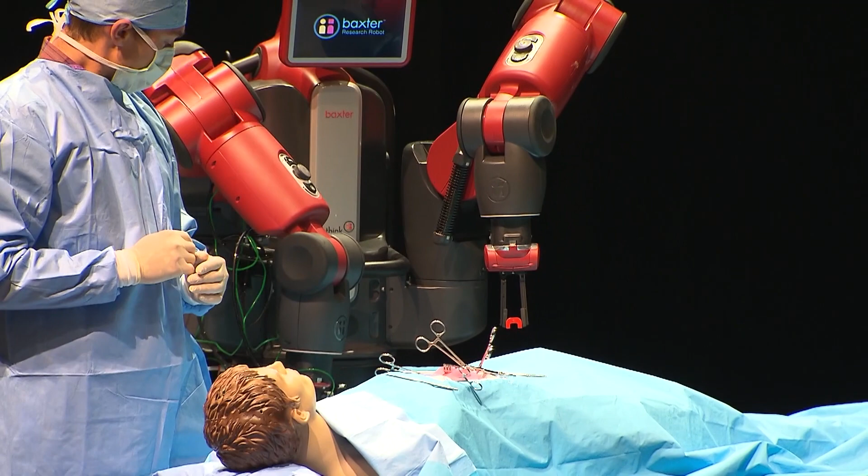All right. Sponge. Last one. Okay. Last one? Last one. All right.

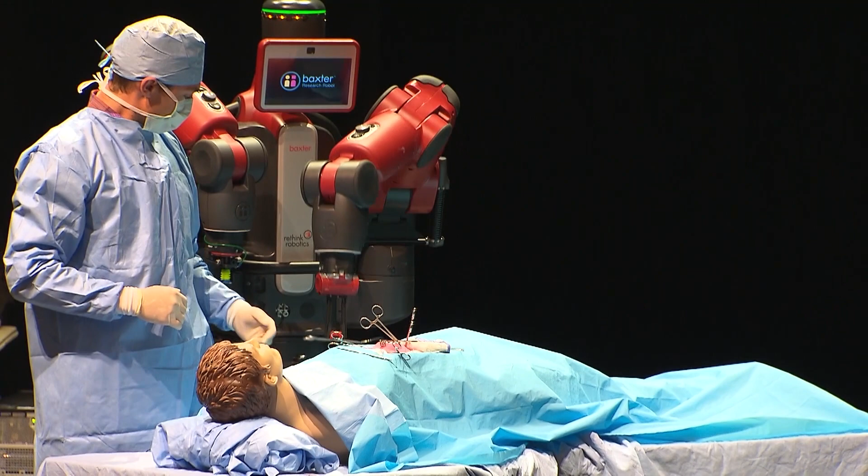All right. Well, thank you very much, Richard.